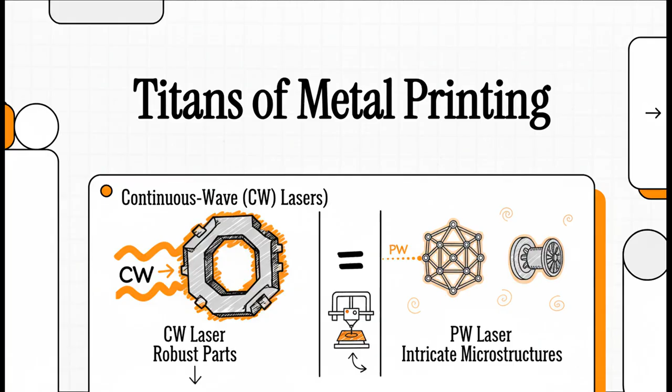Today, we are looking at something pretty incredible, a manufacturing technology that literally builds solid metal parts layer by tiny layer, using nothing but pure, focused light. I mean, that sounds like something straight out of science fiction, right? But it's happening right now. It's a process that can repair and even create some of the most advanced, high-performance components on Earth.

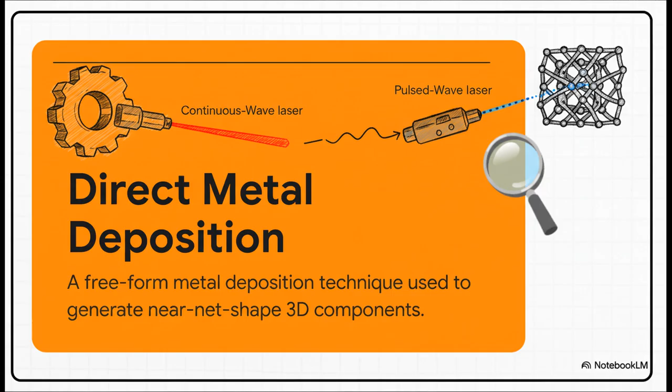So, how does it work? Let's get into it. The core technology behind this magic is called Direct Metal Deposition, or DMD for short. At its heart, it's a really powerful form of additive manufacturing. Think of it as 3D printing, but instead of plastic, you're using fine metal powder and a seriously high-energy laser to build complex parts from scratch, or even repair old ones.

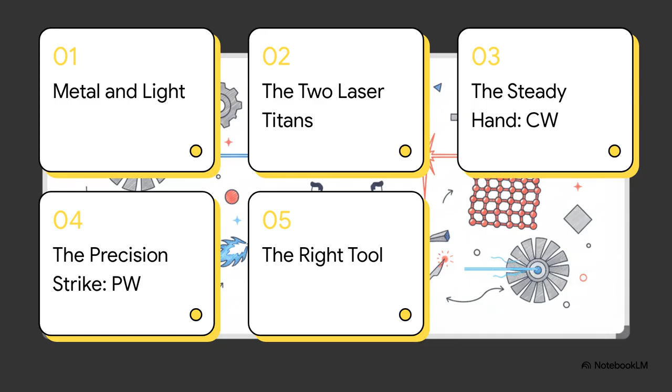So here's what we're going to cover in this explainer. We'll start with how it all works, then we'll meet the two competing laser technologies that power the whole thing. We'll see what each one is good at, and finally, figure out how you pick the right tool for the right job. Okay, so how do you actually go from a file on a computer to a solid metal object you can hold in your hand? Let's walk through the process.

It's really a four-step dance. First, an engineer designs the part in a 3D CAD file. Then, software slices that digital model into thousands of super thin layers. After that, another piece of software creates a precise toolpath, like a roadmap for the machine to follow for each and every layer. And finally, the deposition head gets to work, following that path, melting the metal powder with a laser, and building the part layer by painstaking layer.

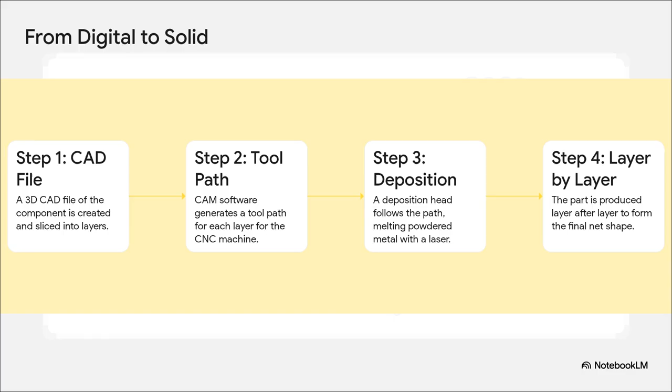That laser, that's the key. It provides all the energy to make this amazing transformation happen. But here's the thing, not all lasers are created equal. In the world of DMD, you've got two major players, two titans competing for dominance, continuous wave and pulsed wave. The best way to think about them, it's like a powerful, roaring blowtorch versus a razor-sharp surgical scalpel. They deliver energy in completely different ways.

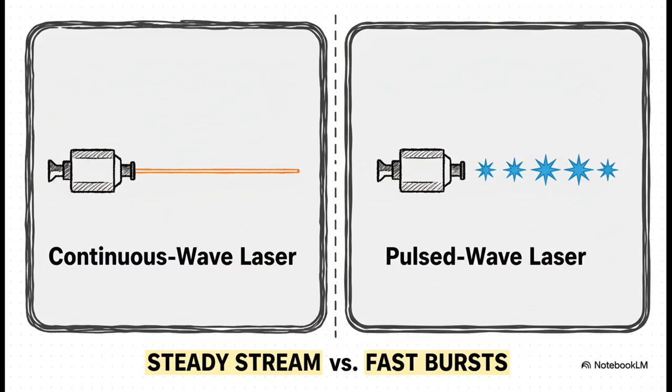So a continuous wave laser, or CW, gives you a steady, uninterrupted stream of energy. It's always on, always delivering the same power, kind of like a hose turned on full blast. A pulsed wave laser, or PW, is the total opposite. It delivers its energy in these incredibly fast, incredibly powerful bursts with tiny moments of nothing in between. And trust me, that one fundamental difference changes everything about what these lasers can build.

First up, let's talk about the workhorse of the industry, the continuous wave laser. Its steady, constant power makes it absolutely perfect for big, consistent jobs where what you really need is strength and speed. So why do people love CW lasers? Well, it's all about reliability and power. That constant stream of energy creates a large, stable pool of molten metal, and that results in really hard components with nice, smooth surfaces. As a bonus, their design is a bit simpler, which usually makes them a more cost-effective choice for a lot of industrial work.

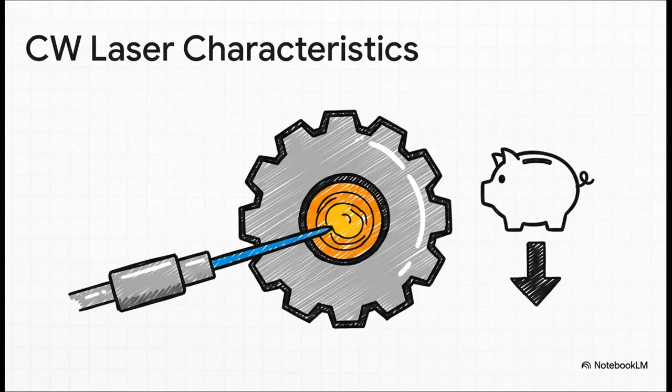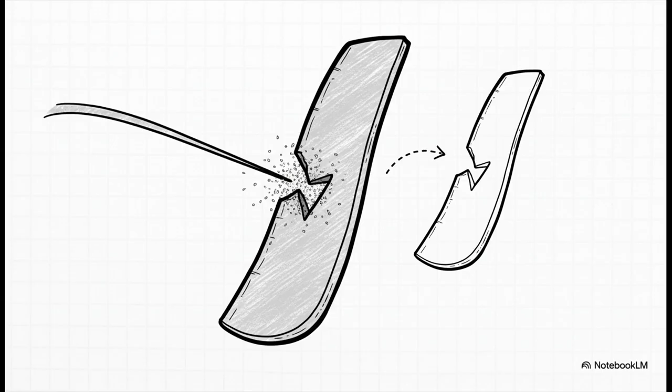One of its killer apps is repairing parts that are just way too expensive to throw away and replace. Think of something like a turbine blade from a jet engine. With a CW laser, you can precisely add new material right where it's worn or damaged, basically bringing it back to life. And get this, this is what's really amazing. Studies have shown that parts repaired with CW lasers can actually have up to 25% higher tensile strength than the original metal. How? Well, the super-fast cooling process creates this really fine-grained structure in the new material, making the repaired spot even stronger than it was to begin with.

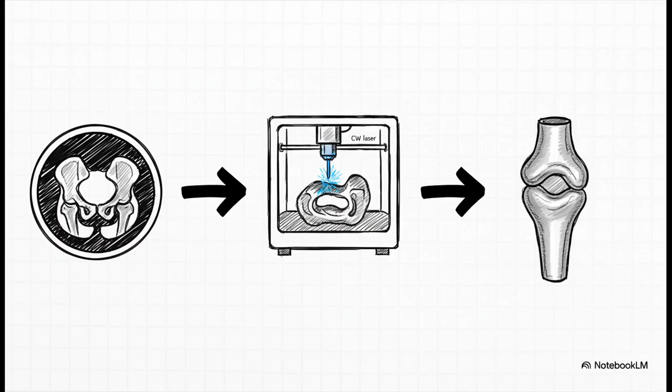Now, those same qualities, that high hardness and that smooth finish, make CW lasers absolutely perfect for creating custom-designed medical implants. You can take a patient's CAT scan and fabricate a titanium hip joint, for example, that fits them perfectly and has incredible strength and durability.

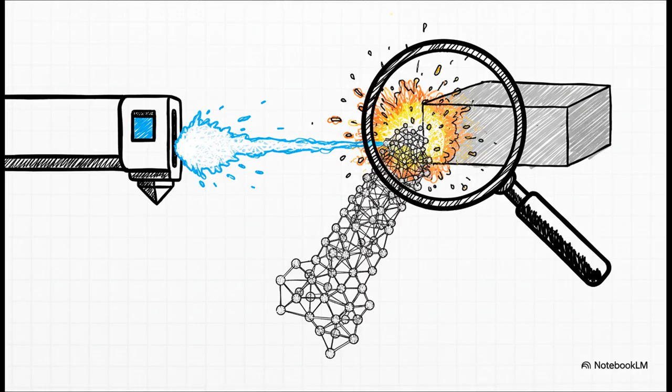Okay, now let's turn our attention to the second titan, the pulsed wave laser. This is the specialist. It's all about precision, delivering just immense power in tiny, tiny fractions of a second. We're talking nanoseconds here. The sheer amount of energy packed into each pulse lets PW lasers do some pretty wild things. They can instantly vaporize material, even metals with ridiculously high melting points. And that gives engineers an unbelievable level of control, opening up this whole new world of microscopic and super detailed manufacturing.

For instance, PW lasers are the only choice for a technique called pulsed laser deposition. What happens here is a high-energy pulse zaps a target material, instantly turning it into a cloud of plasma. That little cloud then settles onto a surface, creating an ultra-thin film that can be just a few nanometers thick with the exact same chemical makeup as the original target.

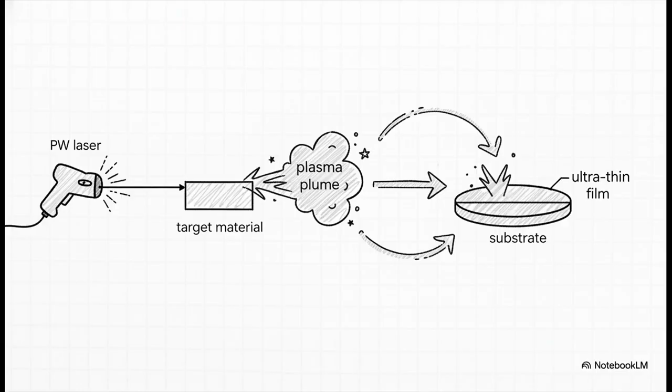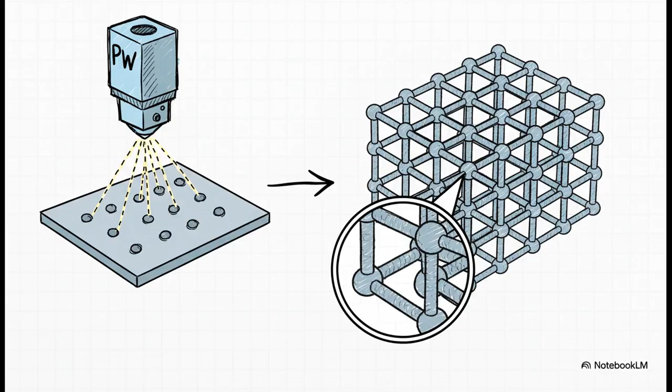It's incredible. These lasers can also create these highly controlled, porous structures. So instead of laying down a continuous line of metal, each pulse deposits a tiny, perfect, ball-like drop. By controlling exactly how those little spheres overlap, engineers can build these intricate, super lightweight lattice materials with absolute precision. Think of things like scaffolds for biomedical engineering. So there you have it, the steady powerhouse and the precision specialist, the blowtorch and the scalpel.

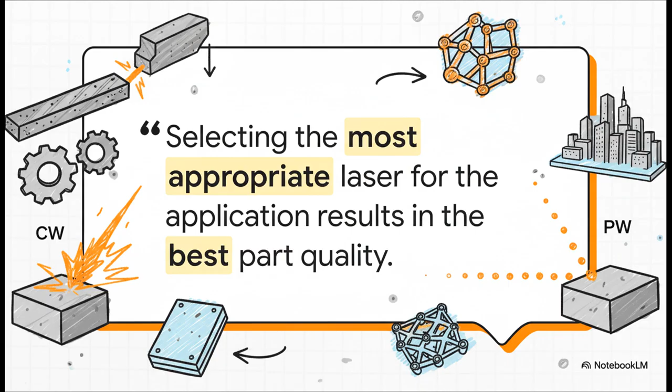So, which one wins? Well, the reality is, there is no single champion. The research is really clear on this. The conversation isn't about which laser is better. It's about which laser is better for a very specific task. The quality of your final part all comes down to picking the right tool for that specific job.

And this table really brings it all home. If you need brute strength, speed, and smooth surfaces for big repairs or tough implants, the CW laser is your go-to. It's the blowtorch. But if you need microscopic precision to create things like nanofilms or complex porous structures, then the PW laser is the only choice.

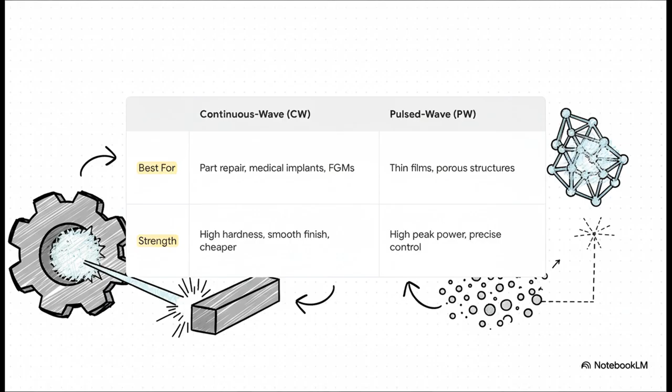It's the surgical scalpel. You see, understanding these two laser technologies isn't just about manufacturing things we already know. It's about pushing the very boundaries of material science itself. When you can control matter at this fundamental level, you're opening the door to creating materials with properties we've only ever dreamed of. It really just leaves you wondering, what's just around the corner? What will we build next?